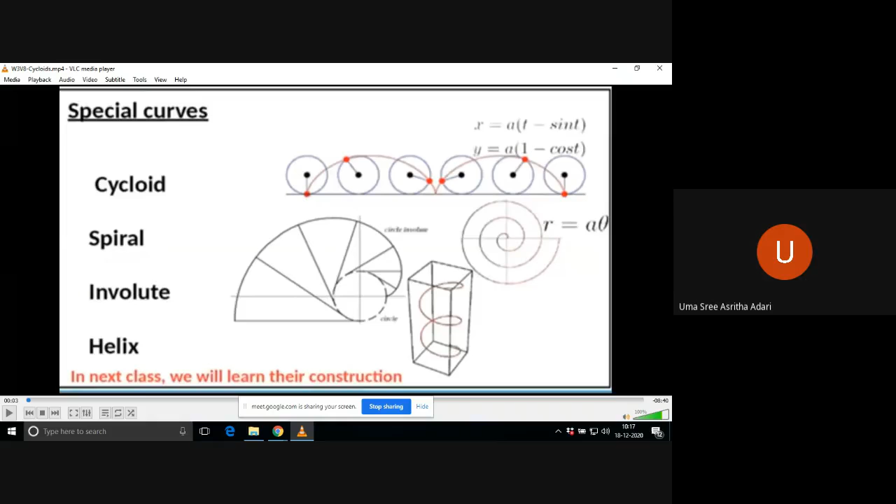Very good. These are some special curves like cycloid, spiral, involute, helix. Luckily, you don't have spiral, involute, or helix in your syllabus - only cycloid. In cycloid, we draw cycloid, epicycloid, and hypocycloid.

The mathematical formula is x equals a times t minus sin t, y equals a times 1 minus cos t. Anyway, you need not remember these formulas, because we are not interested in mathematical formulas. We are interested in drawing the curve.

Now, are you able to see the red curve like this? Yes, sir, it is a continuous process, taking a curve like this. How is this curve generated, and how do we generate the required points? If you don't get the required points, you may not be able to draw this curve with your free hand. To draw this particular curve, you require a number of points, so our task is to generate enough points so that we can easily draw the curve.

Even though spiral, involute, and helix are not in your syllabus, it's better to have some knowledge of spiral. It is something like when you have a spring, you can have this particular diagram.

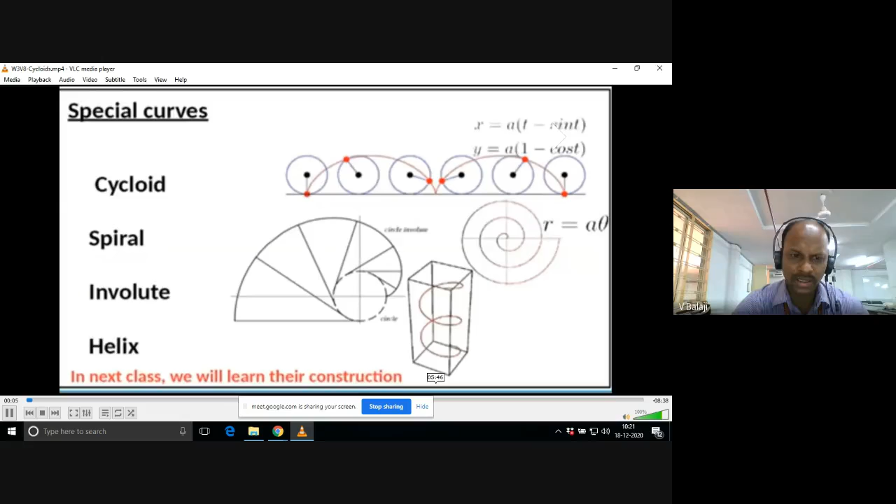Now here you see there is a gear - it is a mechanical gear. If you zoom into this gear, there you will find a special cutting at the teeth, in the form of a cycloidal curve.

Now I have zoomed it - the profile of the gear. You see here, these are the teeth of the gear. So many teeth are there for a particular gear. If you see the profile cutting of that gear, you will find this.

Now I am showing you here the orange type of thing, that is epicycloid, and like that you can find - I will show you all cycloid gears are similar. Three types of gears are there.

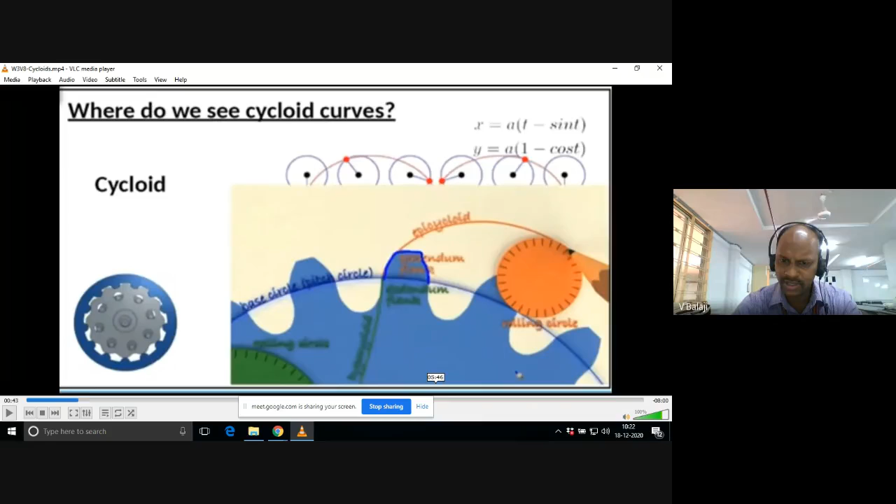And there is one more application for this cycloid - the isochronous pendulum. You might have heard about it in your engineering physics. The shape, the path it takes while it is oscillating, is in the form of a cycloidal curve. It's a special curve.

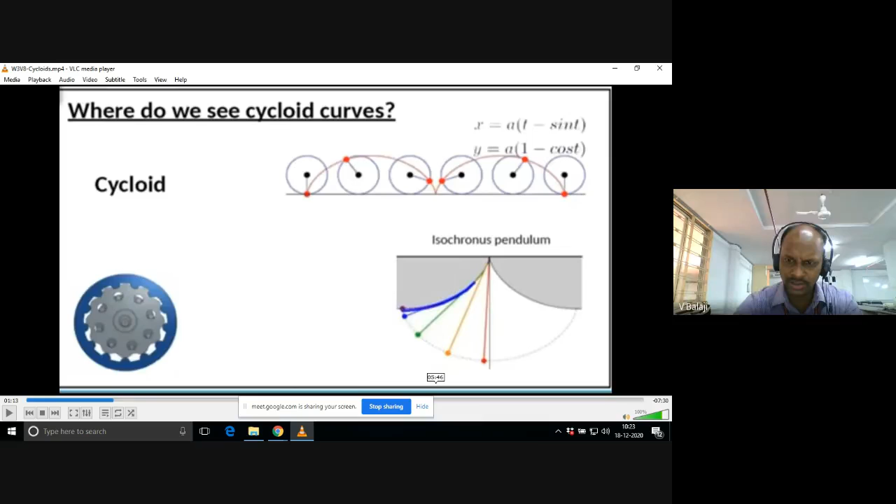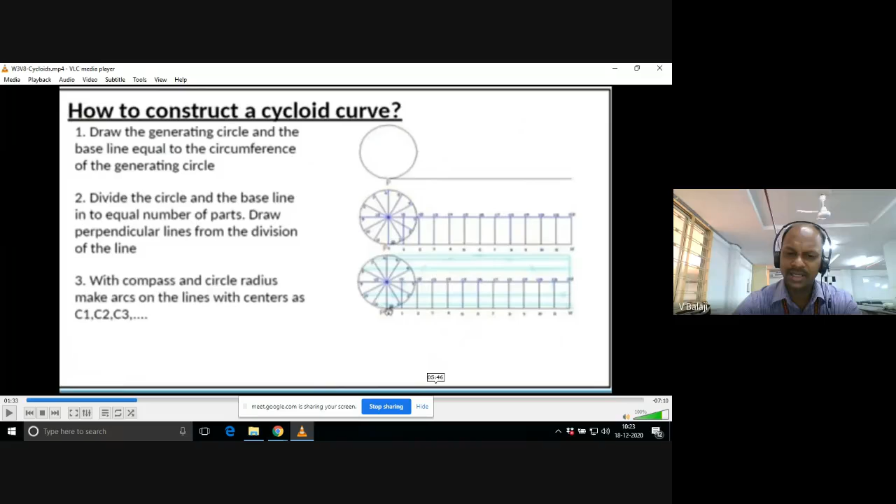And now our interest is to construct it - how to construct it on a drawing sheet. Let us see. I will tell you the step-by-step procedure.

Before that, what does the cycloidal curve mean? Suppose you take a cycle wheel - imagine this cycle wheel, and this is the ground, the horizontal ground. Suppose there is a contact point which is common to the cycle wheel and the horizontal ground - there is a common point P here. For example, if the cycle wheel is rotating horizontally without any slip, it is just rotating.

Suppose you take a pointer on the cycle wheel - this pointer also takes different positions while it is rotating, from this point to this point, for one complete revolution. So if you mark a point at the bottom of the circle initially, that point, while traveling from this place to that place for one complete revolution, will take different positions along the path. That path, which the point takes, we call the cycloidal curve.

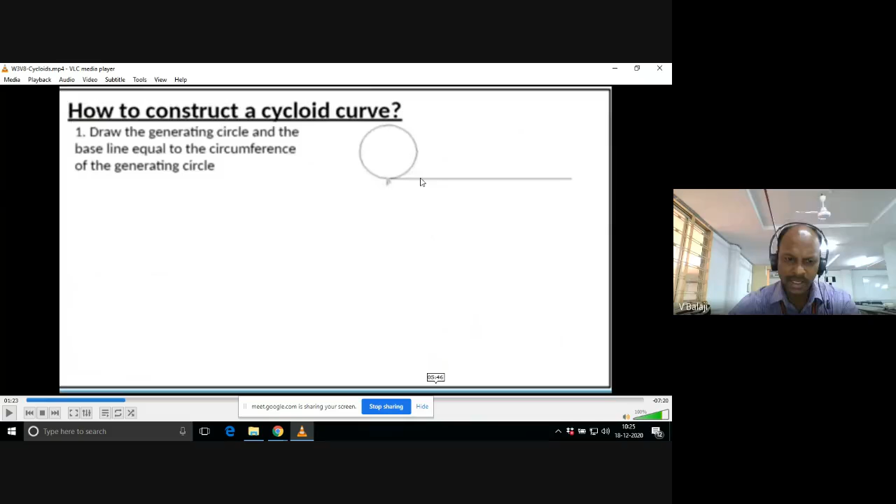Now, I would like to share one more screen to explain everything. I think I will show you one more figure to draw how to draw the cycloid. Okay, one minute.

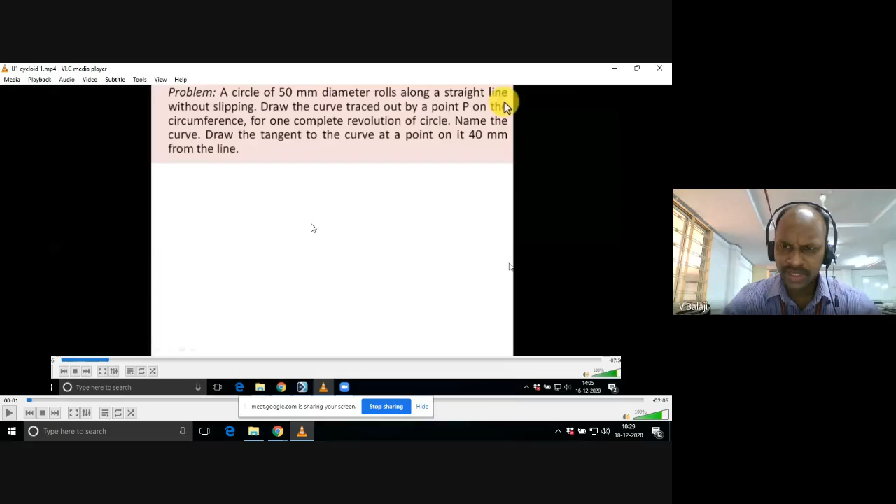So in the last class you were asking, right side of the ellipse we don't understand, sir, like that you were asking, right? So while I am teaching, if you draw along with me, even such questions may not arise. Okay, so anyway, if you are ready, please make it up, or else you practice at the end of the class.

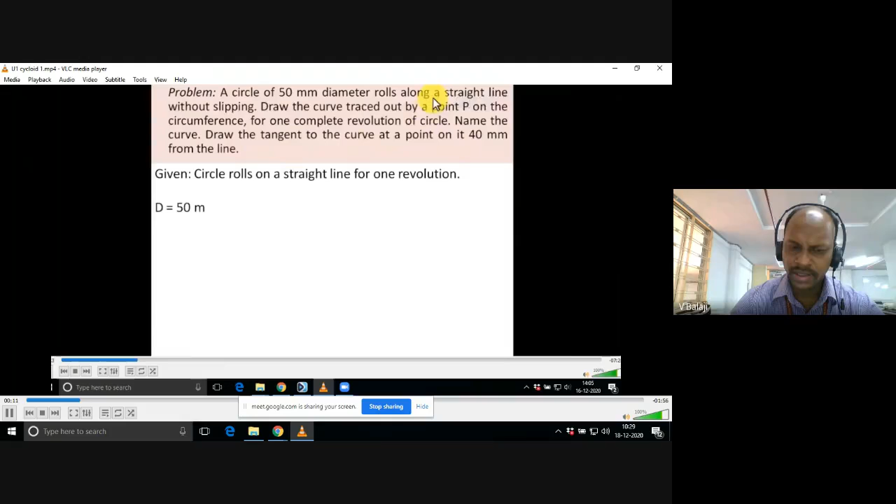The first important step is you read the problem carefully initially, that is very important. And note down some important theory aspects or data given in the problem. Okay, circle rolls on a straight line for one complete revolution, this is the important key data given in the problem. Neglect about tangent and normal, do that later.

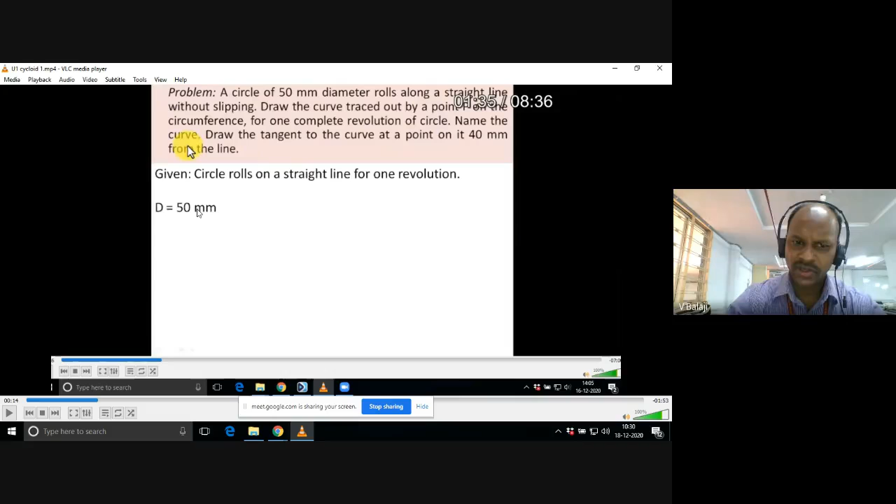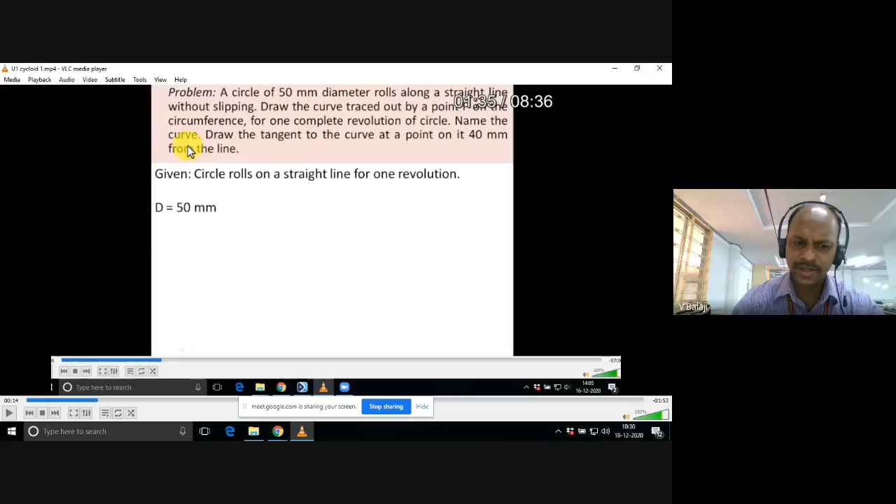So diameter capital D is 50 mm. So for one complete revolution, what is the length it is traveling on the horizontal ground? Do you have any idea? Circumference, yeah very good. Circumference means what is the formula? 2 pi r, yeah, you can write pi d or 2 pi r.

So you know pi means 22 by 7 into d. Calculate, 157.14 millimeters. Now you calculate this simple calculation.

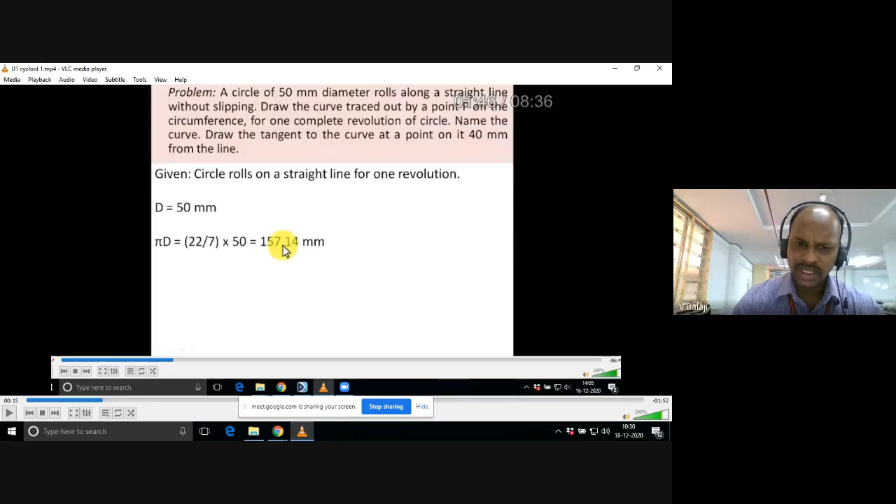Then you start our problem like this. Now what you have to do is you take a circle. What is the diameter of the circle? 50. What is the radius then with the compass? 25. Yeah, with the compass take 25 millimeter only, 2.5 centimeter or 25 millimeter.

Draw one circle. Okay, and at the bottom of the circle mark point P, and from P you draw one horizontal line, PQ, which is of length pi d. Now you can understand why we have drawn this pi d length, because the point P initially here, after traveling one complete revolution.

After the circle or cycle wheel rolls for one complete revolution, initially the circle is here, right?

After some time it is rolling, so it goes to here, taking a maximum distance of pi d. Now divide the circle into equal parts.

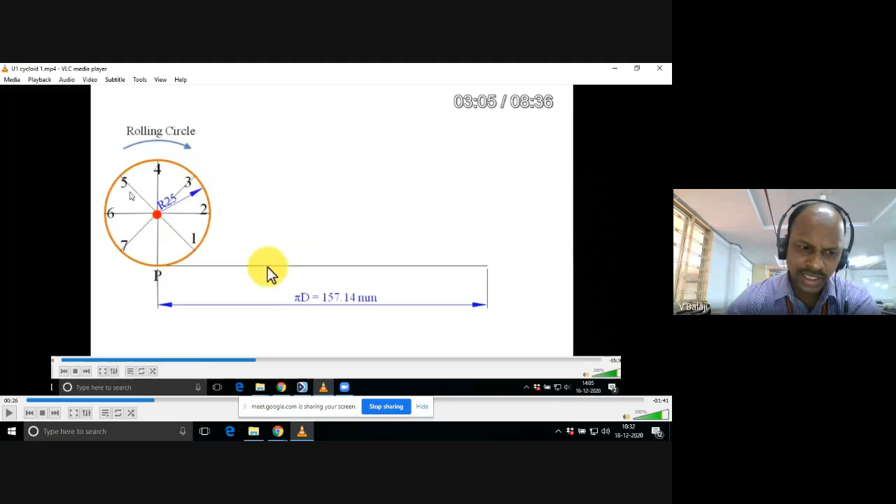Even number of equal parts. How many parts have I divided here? 8 parts, right? So how to divide that with your instruments? You have so many instruments, right? Which instrument do you use to divide the circle into 8 parts?

Any idea? Protractor, 360 degrees. Yes, protractor. 8 parts means what angle of the protractor do you need to take? 45 degrees each. Very good, very good.

You can take even 12 parts by taking 30 degrees, so that you will have more points and can easily join the curve. So don't take less than 8 parts, minimum 8 parts, and you can even take 12 parts.

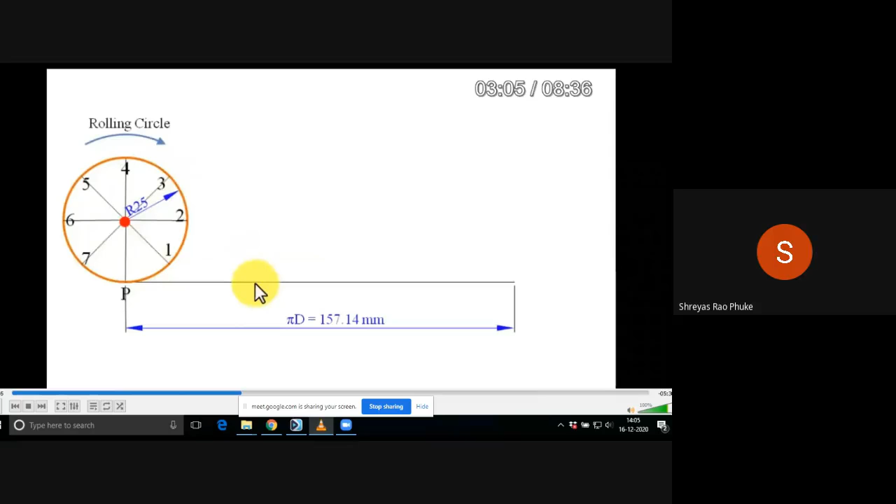Now you see the rolling direction. Is it rolling clockwise or anti-clockwise? Clockwise. Very good. So the starting point is P at the bottom, which is touching the ground.

This pi d length I am drawing horizontally. Treat this as the ground, a horizontal ground. Now the numbering system - you need to put numbers to the parts. You have divided 8 parts, right? So from P in the anti-clockwise direction, give the numbers 1, 2, 3, 4, 5, 6, 7, like this. That means this is the first part, second, third, fourth, 5, 6, 7, 8 parts are there.

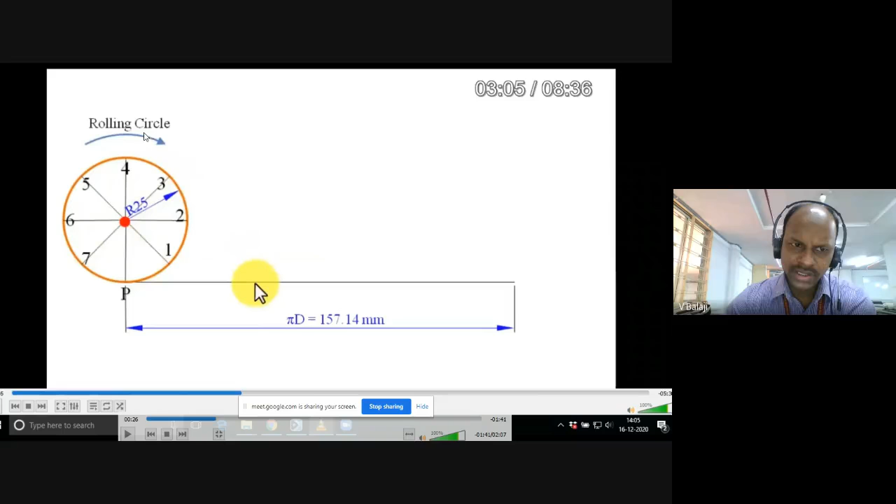You need not mention 8 because P is already there. Don't write 8 here, not required. Remember, the rolling direction is clockwise, but take the anti-clockwise number system: 1, 2, 3, 4, like this. Can you do up to this? Any difficulty here? No difficulty, sir.

The next step is to mark the center somewhere here. You call the center point as C. Then how many parts have we divided the circle into? 8 parts, right?

Similarly, divide the pi d length into 8 equal parts. How do you divide the length pi d into 8 equal parts? Line division method, yes, very good. You know, we need to draw 8 arcs on the angular line we have taken.

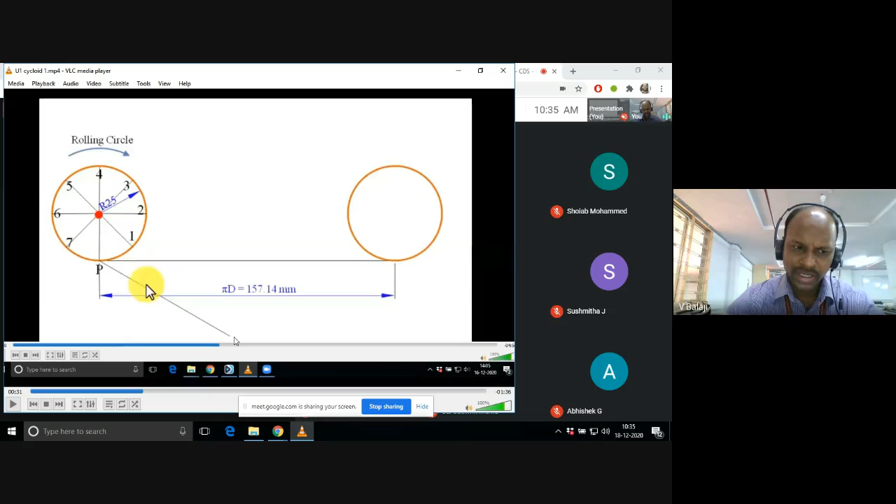Can you make it like this? 8 arcs: 1, 2, 3, 4, 5, 6, 7, 8. What is the angle of this line? Any angle, less than 90 degrees, 0 to 90, any angle according to the space available on the drawing sheet. If you take more angle, it will take more space on the drawing sheet, so you better take a smaller angle and mark 8 arcs.

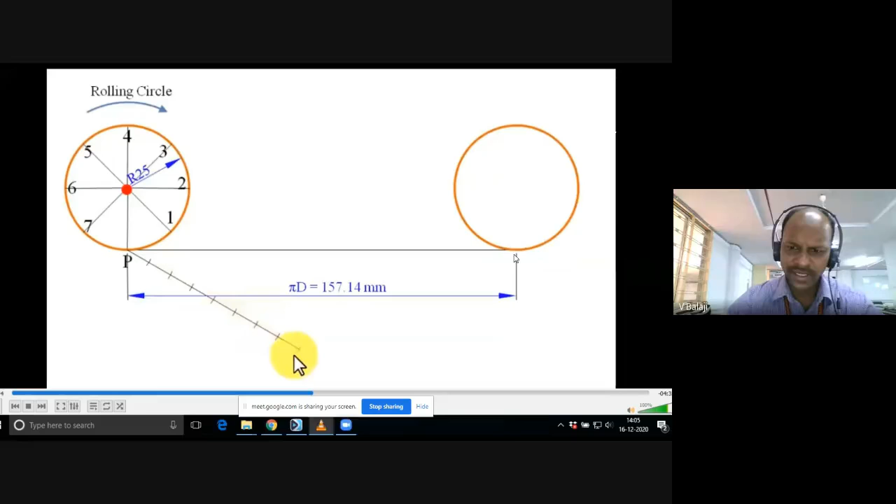The last arc we need to join to the other end of the line which we are going to divide. So this point is joined to the other end of the line like this. This is a very important line. And here I am showing you one more circle that you need not draw - not required. If you are interested, you can draw it, nothing wrong, but it is not required.

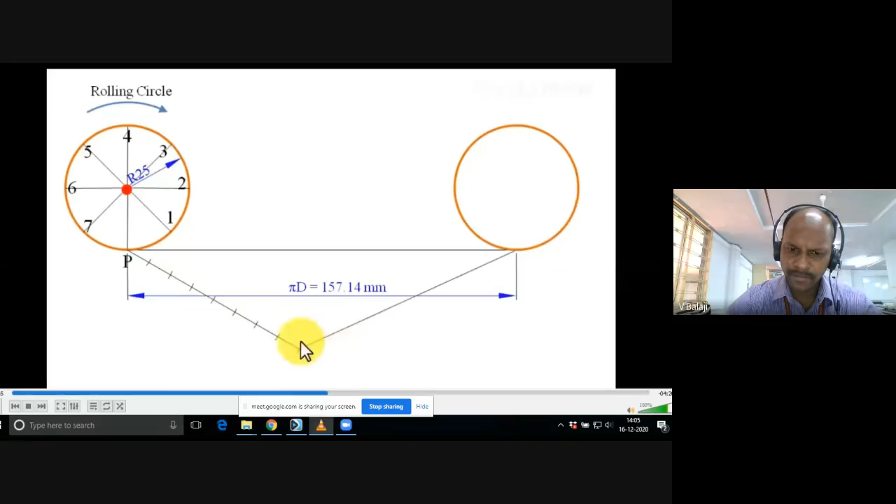So after that, to divide into 8 parts, I have to adjust my mini drafter parallel to this line and move the drafter parallel to this line from different arcs. Like this. Can you do this, right? So automatically this horizontal ground is divided into 1, 2, 3, 4, 5, 6, 7, 8.

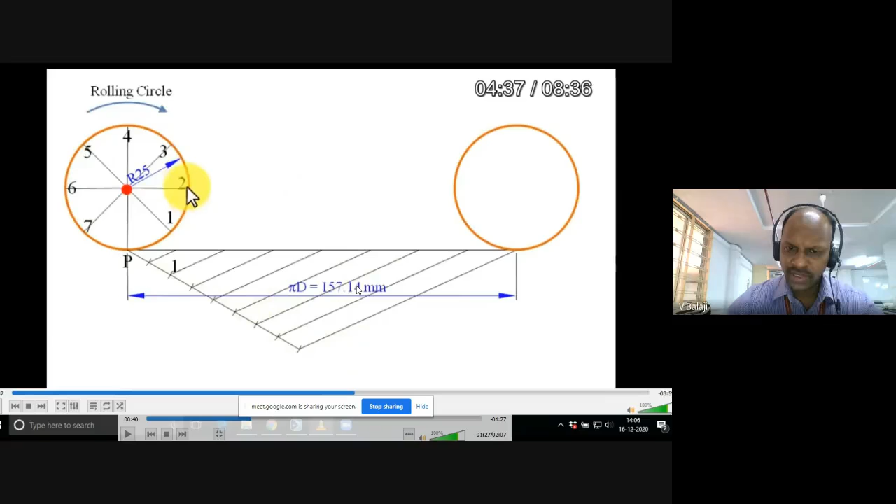So this is 157.14, but roughly with the mini drafter you can take it as 157. Forget about the 0.14, it's very negligible, right? So you automatically divide it into 8 parts without any calculator - not required. Directly you can use this line division method, and automatically this length pi d will be divided into 8 parts.

The next important step is the numbering system. Take P, or you can take PQ, whatever you wish. Then put the numbers 1, 2, 3, 4, 5, 6, 7. And the dimension line you can put like this, away from the drawing: pi d equal to 157.14.

Then, the next important step: passing through 1 and 7, draw one horizontal line. Passing through 2 and 6, draw one more horizontal line. Passing through 3 and 5, draw one more horizontal line. Passing through 4, draw one more horizontal line. How many lines are there now, apart from the ground line? 1, 2, 3, 4.

4 lines you have to draw. The first line is common for line 1 and 7. The second line is common for number 2 and 6. The third line is common for 3 and 5. Line 4 is common for 4. So these are the 4 horizontal lines we need to draw.

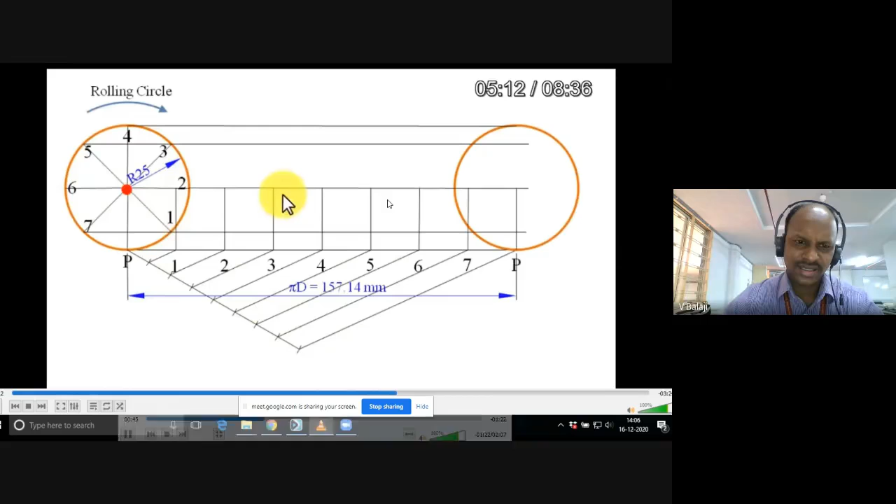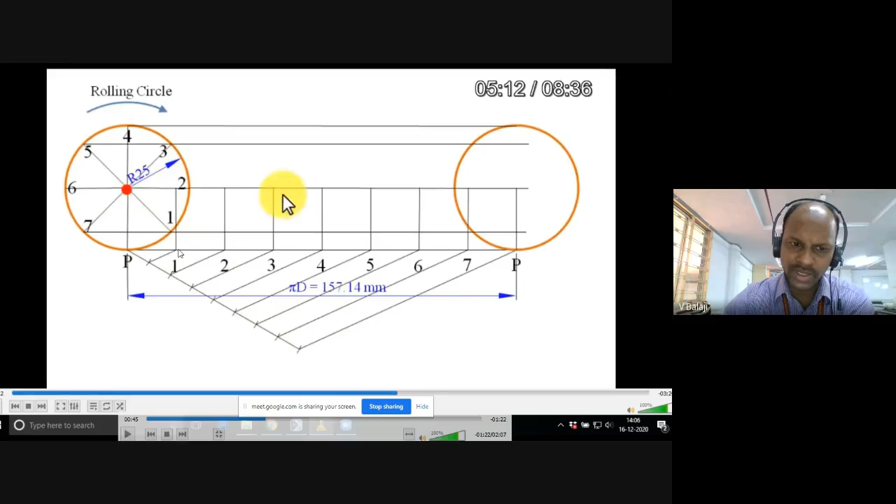Next step: from the ground we got points 1 2 3 4 5 6 7. Draw vertical lines up to the center line. The red point is there, that is the center of the circle. There already you have a line passing through 2 and 6, that is the center line. Up to that you extend, or draw perpendiculars from the ground, like this, like this.

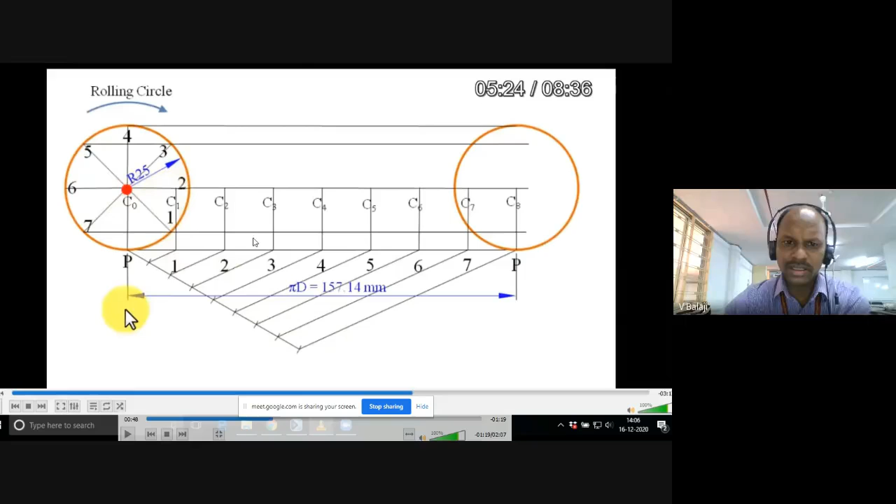Thereafter you number, starting from C naught. The center of the circle is C naught, and the first perpendicular from the ground is 1 to C1, second perpendicular 2 to C2, third perpendicular 3 to C3. Like that you continue up to C8. Actually C8 is not required, up to C7 you can do it. Then, almost like ellipse, parabola, hyperbola, we have done the steps required to construct a cycloid.

The last important step: take your compass, set the radius 25. The radius is constant, don't change the compass radius till you complete all the arcs. Take your compass, radius 25. The center of the compass will be changing from C1, C2, C3, C4, like that, but the radius of the compass is 25 only till you are cutting all the arcs.

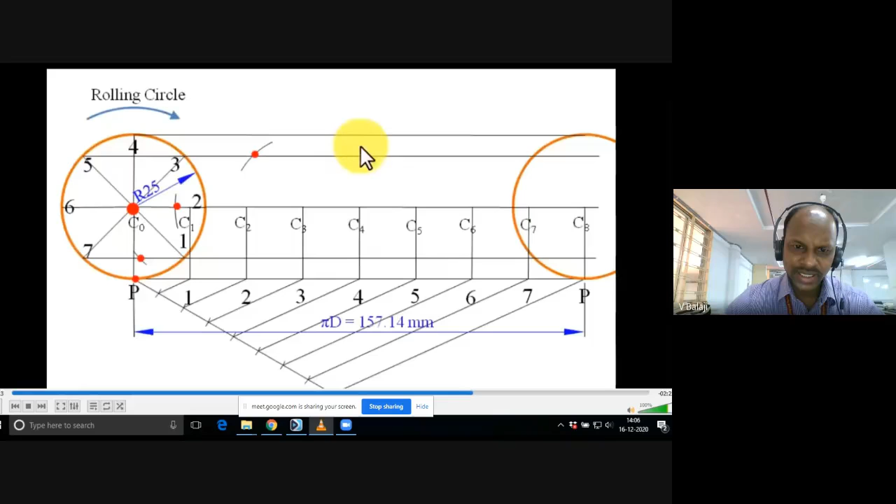Yes sir, yeah. Now go to center C3, cut the third line common to 3 and 5. Next, go to C4 center and cut the fourth line. The fourth line is common for only the fourth point. And you will get one more arc.

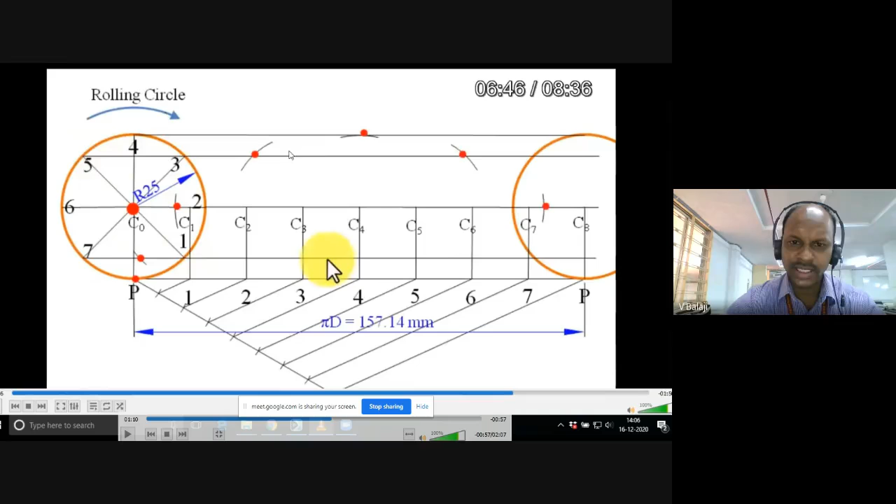Now you may have a doubt here: if you go to C5, center C5, where do I cut, left hand side or right hand side? Because as we move, the curve will look like this, a symmetric curve. So after finishing the center point we generated, the next points you have to cut on the right hand side. C5 is the center, and the fifth line is the same line common to 3 and 5, because center C5, fifth line means again the line common for 3 and 5. So cut the fifth line, right hand side you have to cut like this, don't cut left hand side, because we are getting a symmetric curve. That you must know.

Now go to the C6 point, again center C6, which line do I have to cut? Can you please tell me whether you are following or not?

From center C6, draw a line. The line common for which points? 2 and 6. Very good, 2 and 6. You will get one more point.

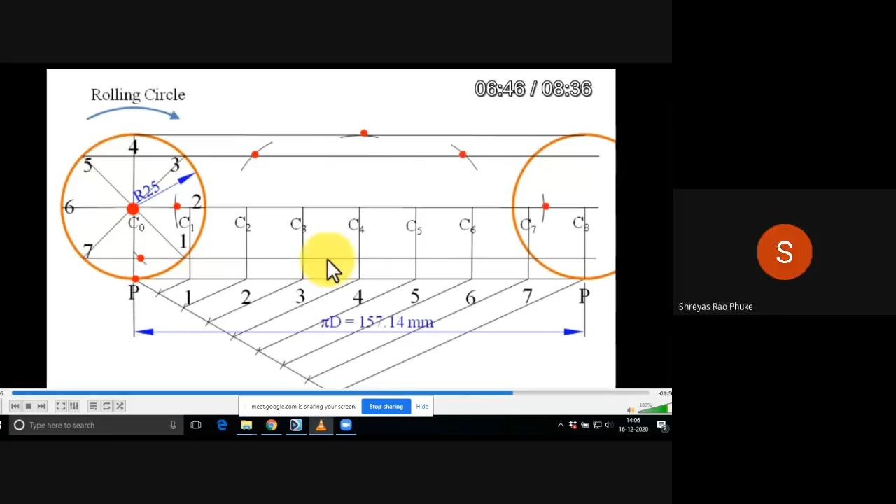Lastly, C7. With C7 as the center, cut the line passing through 1 and 7. So I got the required points. You need not consider C8. I told you, don't write any 8 here. You need not write 8. C7 is sufficient.

Then, lastly, the initial point is P, and the end point is also P. You can note down, so I got how many points? Starting with P, 1 point, 2, 3, 4, 5, 6, 7, 8, 9. So if you neglect the base ground points, you will have 1, 2, 3, 4, 5, 6, 7. Actually speaking, you have generated only 7 points.

P and P, the starting and ending points, are the horizontal ground points, where the point started and where the point ends. Per one complete revolution, this is the length traveled by that point horizontally, by the length it takes on the horizontal path. So this is the procedure to generate all the required points.

Thereafter, it's a simple procedure. You can take your HB pencil. All other lines till now, including the circle, including the perpendiculars, all horizontal lines, even the line division method, all of that you have to use 2H pencil, a light pencil. Okay, then coming to the...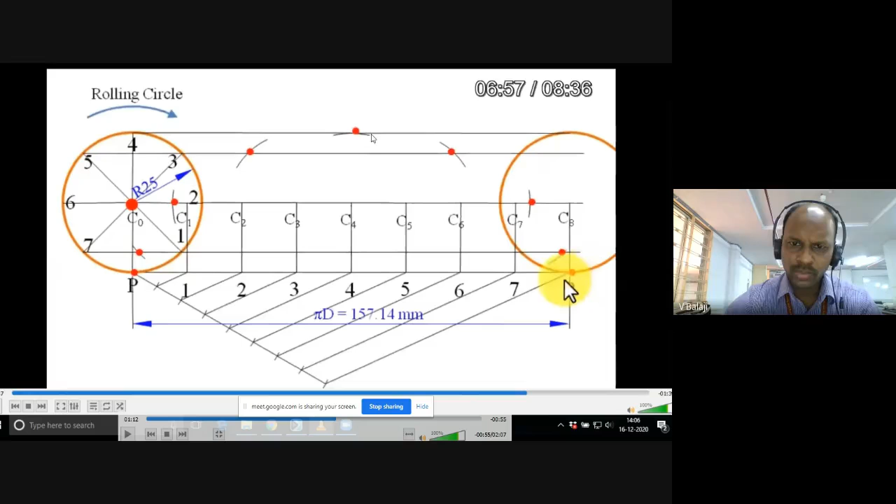HB pencil, take your HB pencil, use freehand, draw a smooth curve passing through these points. You will get a smooth curve. I call it as cycloidal curve.

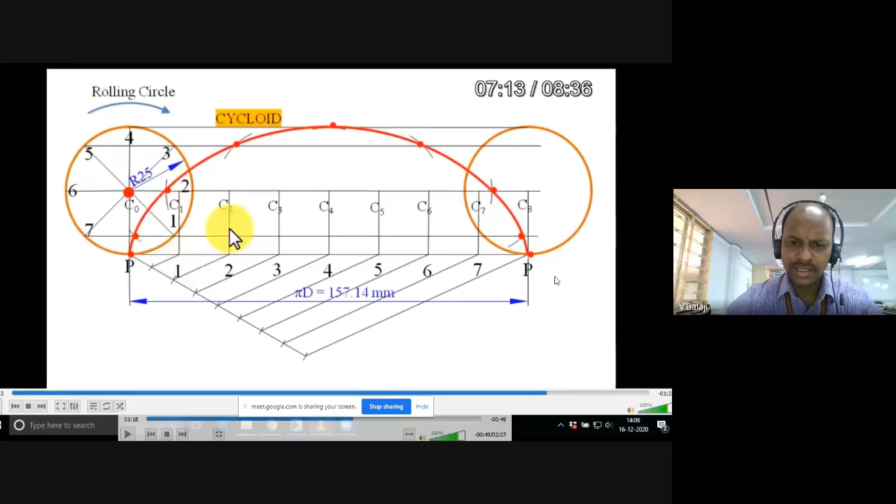Is it clear? Yes, sir. Yes, sir. Yes, sir.

Now, one more important thing is how to draw the normal and tangent if you are given a point on the curve somewhere.

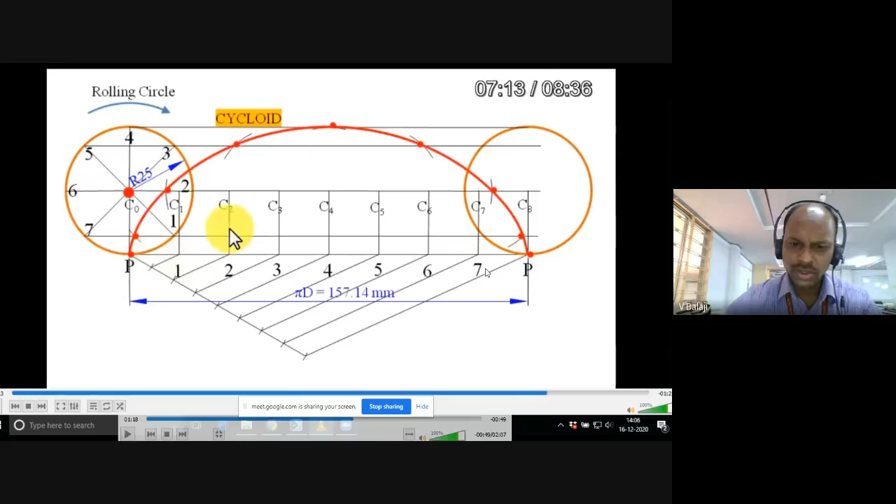Select any point. If it is given in the problem itself, you follow that distance exactly. So in the problem, some height is given, right? Some 40 mm from the ground—you take a 40 mm horizontal line. It is meeting the curve somewhere here. You call that point as some Q.

Just listen, thereafter I will continue. From that point Q, take again your compass, radius 25, and cut the center line passing through 2 and 6, somewhere here. After that, you draw a vertical line onto the ground.

It is very important because these steps you can apply for even epicycloid and hypocycloid—there are two more special curves in this particular topic. We need to draw these using the same procedure. So remember the steps; while drawing normal and tangent also, you can adopt the same procedure, starting from the given point on the curve.

Sir, can you please show the method to draw normal and tangent again? Yeah, sorry, one minute. See... one minute.

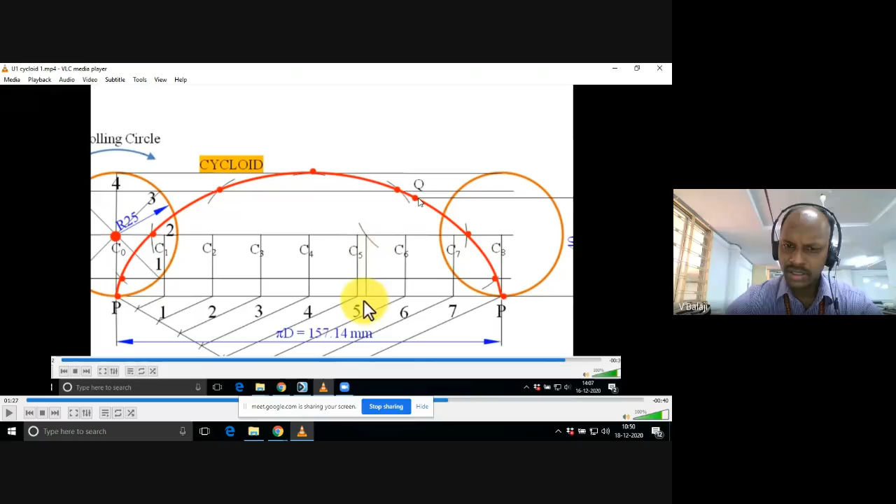Okay, and from that point, take a 25 mm radius. Draw one arc on the center line—the center line passing through 2 and 6. This arc you are getting with the compass. From that point, you draw a vertical line onto the ground. So this is the point.

Now take that point as some M. Join M and Q. That is the required line. Now tell me, is it normal or tangent? Normal, sir, because it is passing inside the curve. So normal. How to draw the tangent?

Now do you tell me? Draw a line perpendicular to the normal and it will be tangent. Correct. Simply, normal and tangent are mutually perpendicular to each other. Already I got the MQ line, the normal line.

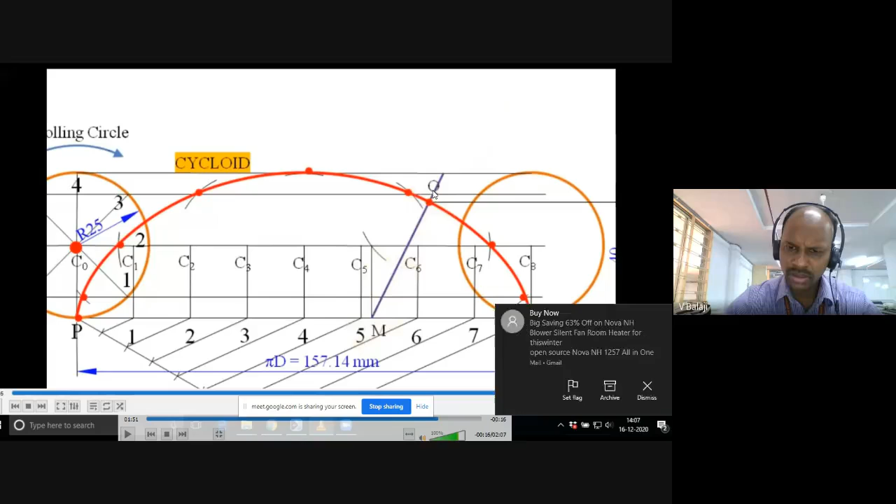Using a protractor or mini drafter—the mini drafter has a 90-degree scale, right?—simply match one of the mini drafter's scales to this MQ, and draw one more perpendicular line to that. That is going to be your tangent.

So like this, you need to draw a tangent. You see, this is the tangent. It is drawn outside the curve, touching the curve tangentially, I can say. So this is the way you need to make up the cycloidal curve.

So here I have shown you 40 height. You draw one horizontal line. That is the required point at which we need to draw the normal and tangent. So for that reason I have drawn one 40 height line here. With your drafter, just mark a point at 40 and draw a horizontal line with the help of mini drafter, parallel to the ground PP.

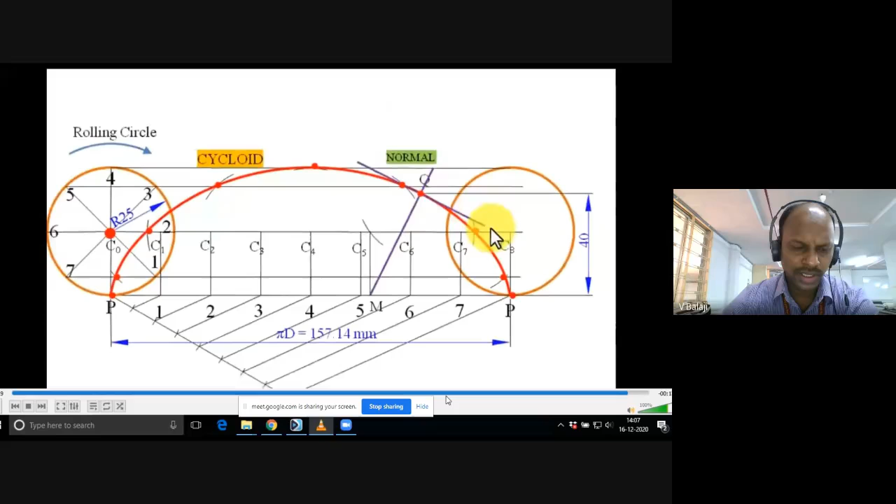You would understand later, don't worry. Any confusion in the procedure, you can raise it, 2 or 3 questions, then we will move further and discuss more. Any other specific questions? Or else can I repeat the entire procedure? Yes, sir, repeat, sir.

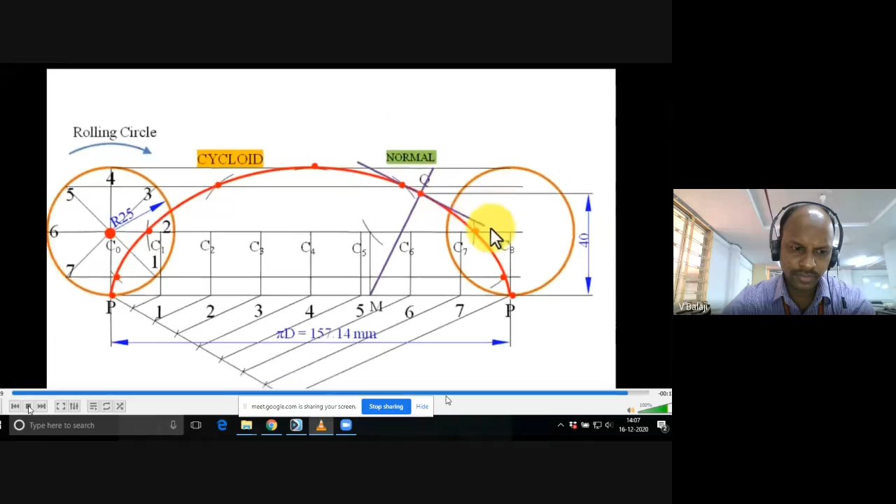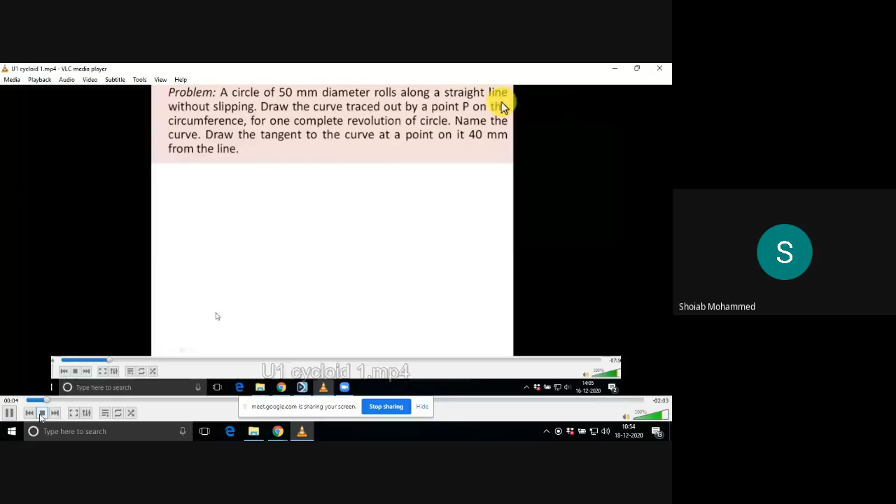Is my screen visible to you? Again, any problem? Visible, yes sir, it's visible.

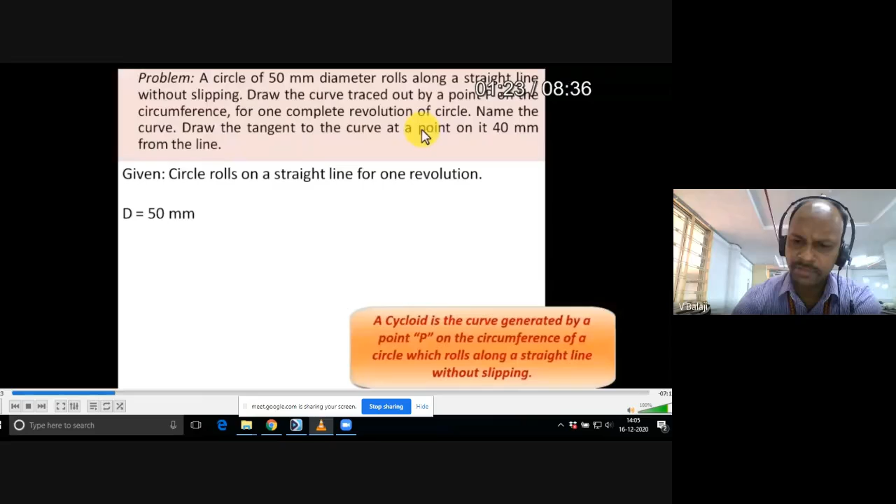Okay, now this is the problem you are given. The data is very simple data. Simply they will give you only the diameter. Draw the cycloidal curve for one revolution, that means pi d length only. So take a rolling circle, 25 radius, since diameter is 50, right?

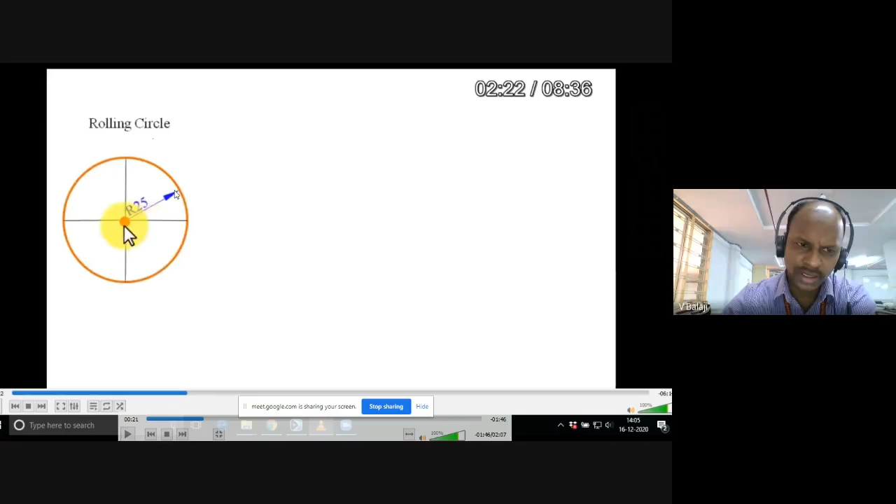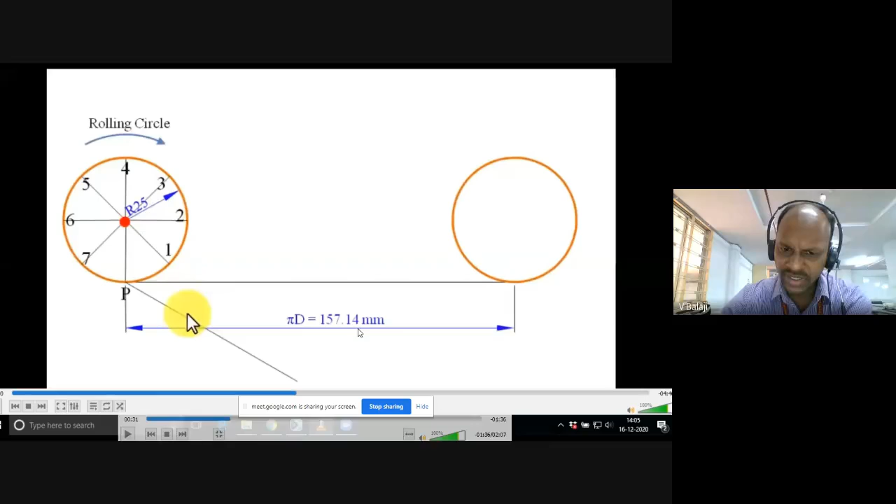Draw the circle, first divide it into 4 equal parts, then you can use the bisector method or a protractor to divide it into 8 equal parts. Then give the numbering system opposite to the direction of rolling. Take 1, 2, 3, 4 like this in the opposite direction to the rolling direction. That is important. Make it 1 to 7, starting point P, end point also P. Pi D length is 157, if it is 157.8 take 158, but it is 157.1 only, so take only 157. Divide this pi d also into 8 equal parts like this, using the line division method explained earlier, right?

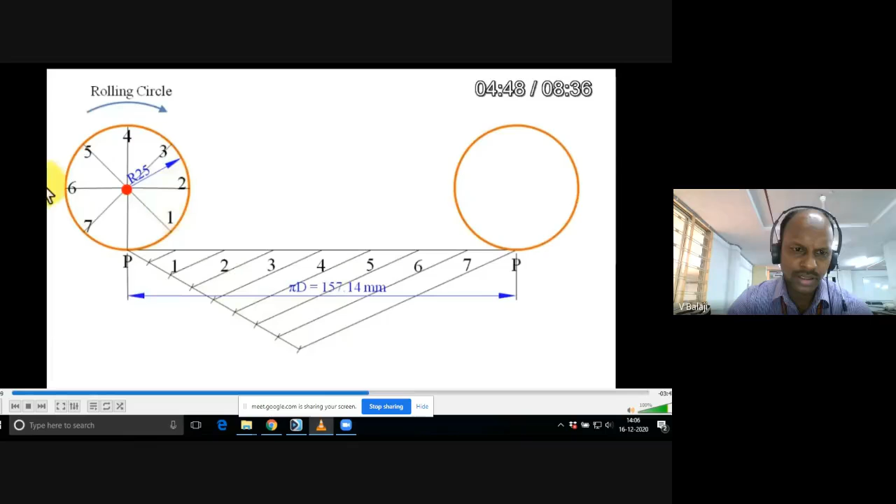And you can draw one more circle at the end, not required, but if you want to draw, you can. And draw 4 horizontal lines passing through 1 and 7, because 2 and 6 will lie on the same line, and 3 and 5 similarly. So you draw 4 horizontal lines.

Use the mini drafter while drawing these horizontal lines. Whenever you draw with your mini drafter, first set the mini drafter parallel, matching to this PP ground line. While moving your drafter from here to here, set the mini drafter matching to PP, tighten it. Then gently move your drafter from bottom to top, passing through 1, 7, 2, 6, 3, 5, and 4. While moving the drafter, only hold the mini drafter knob, don't keep your hands on the scale.

After tightening the drafter knob matching to this PP, then hold the mini drafter knob and move the drafter from bottom to top to draw the horizontal lines passing through 1, 2, 3, 4. That is important, usage of instruments is very important.

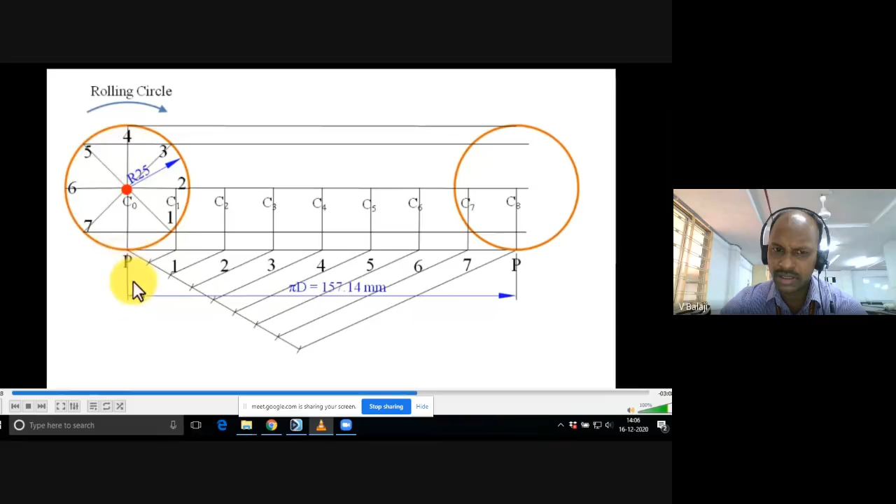Draw vertical lines up to the center line. Name them as C0 center, first center C1, C2, C3, C4, C5 on the center line, only up to the center line. Extend all the verticals.

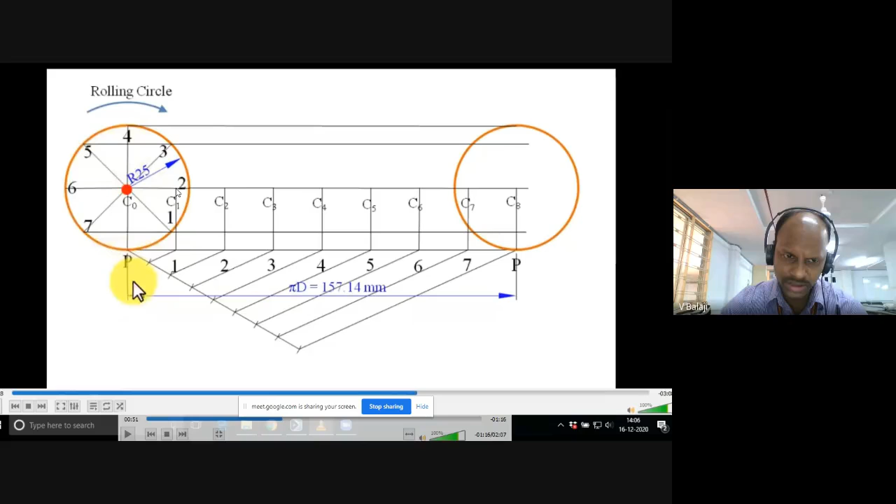Thereafter, our procedure is almost completed, right? Take your compass, set the first radius, the radius is fixed. First center C1, cut the first line common to 1 and 7 somewhere here. And this is the first arc we are getting from center C1. Radius is always constant, it's 25 only.

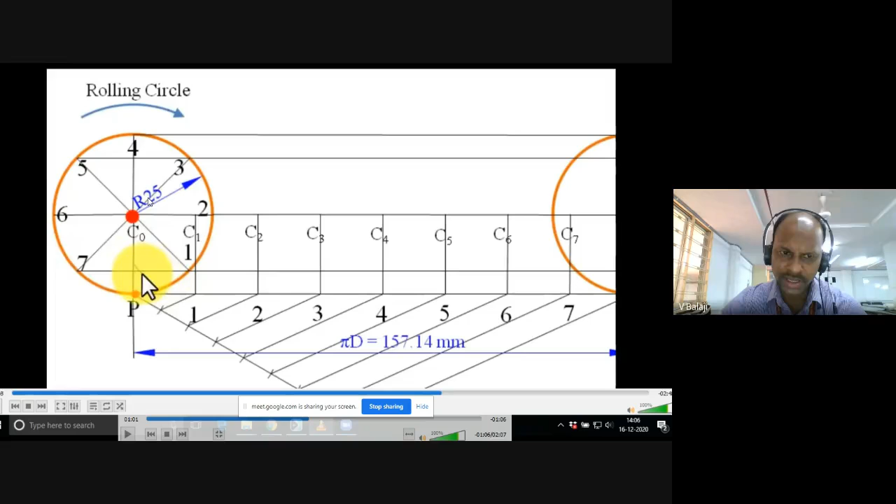Don't change the radius because through the rolling, the circle diameter is not changing. So don't change the radius of the compass, but change the centers C1 to C2, like that. In that way, you will have so many points like this. Simply join all those points with a smooth curve, freehand only. Don't use any French curves. Practice it, first time may not come exactly, but see that it is symmetric.

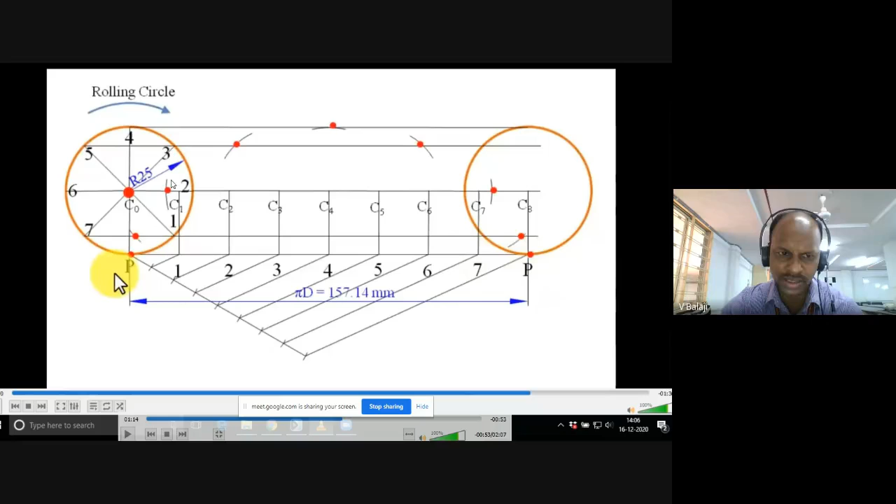Up to this, however you are drawing, similarly try to draw in the same fashion on the right hand side also. Then you will find a smooth curve like this.

And for finding the normal and tangent, what you have to do? Take any point at a given distance, 40 mm height, draw one horizontal line. Call that point Q. If nothing is given about the height, you can choose randomly anywhere on the curve. Apply the same procedure to get the normal and tangent at that point. For a curve, at any point, you can get one normal and tangent.

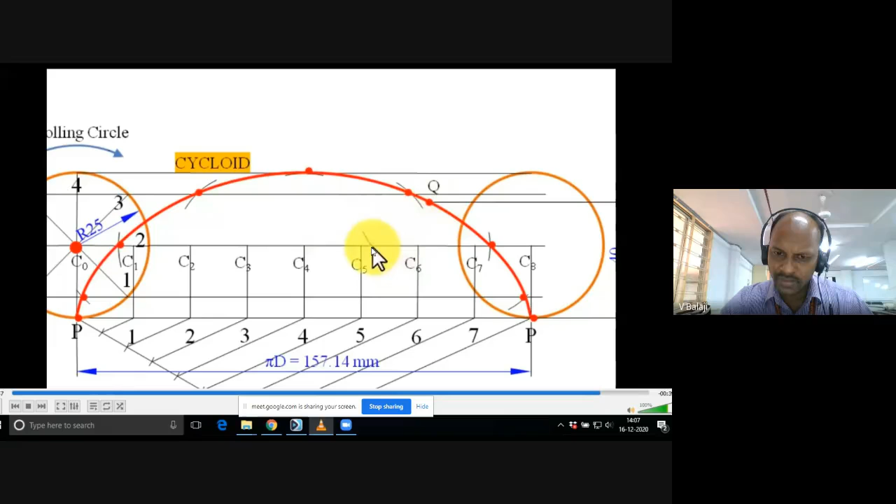So after selecting point Q, take 25 mm radius with the compass and cut the center line. Somewhere here with radius 25, I got this arc. After cutting the center line, you got one point here. Drop down one more line onto the ground, like this. Now you will get one more point here on the ground. Join that point to Q.

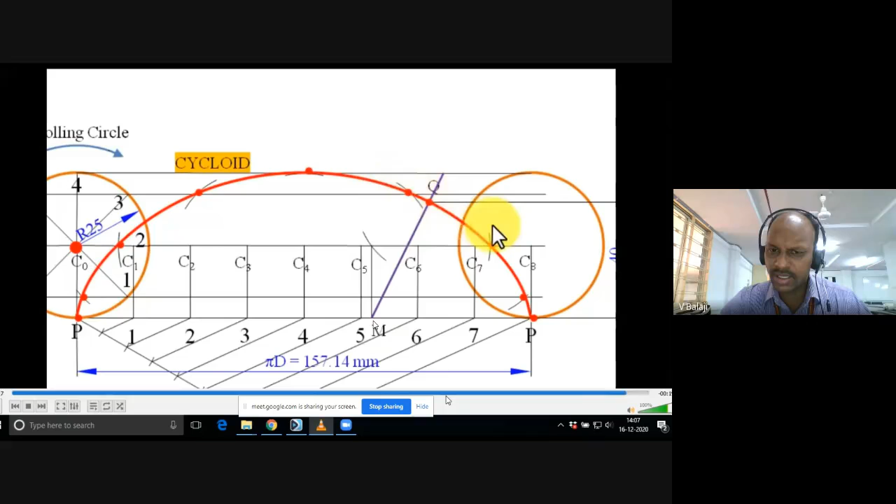Starting where you selected the point on the curve, call this point M, and this point is already Q. This is the normal. With the help of a protractor or mini drafter scale, you can draw the tangent at point Q. At point Q, you need to draw one 90 degree line to this normal — that is the required tangent.

So I hope you will be able to make up this sketch, this drawing, in the next class. Can you show me?

Yes sir, yesterday you have given 3 diagrams, sir, that one we should submit to your mail, sir. Okay, I'm asking, can you be able to make up this cycloid? Yes sir, but how to show you?

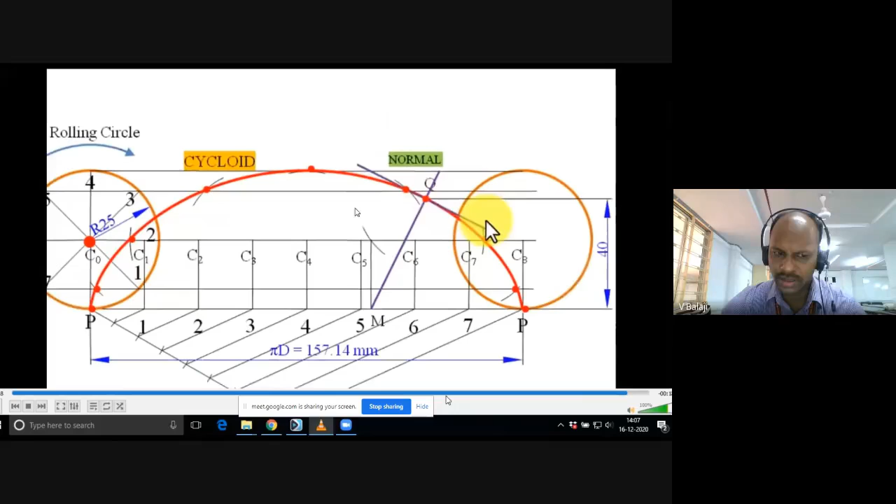What is next is epicycloid. What's the time now? So we are having 7 more minutes. Just I will give you some outline of epicycloid, then we will discuss or draw it in the next class.

Please sir, wait, one doubt sir, in this cycloid... no sir, about the drawing sheet, can we write with pen, sir? Everything, I mean titles? No, title names, no, never use pen.

Always use HB pencil while writing the title and all. Inside the drawing area, wherever you require to use HB pencil, use HB pencil there only, otherwise use 2H pencil only. Never use pen. I will give you an option — while writing your name or roll number, you can use pen. Otherwise, don't use pen anywhere.

Then coming to the... I will give you a small introduction of epicycloid.

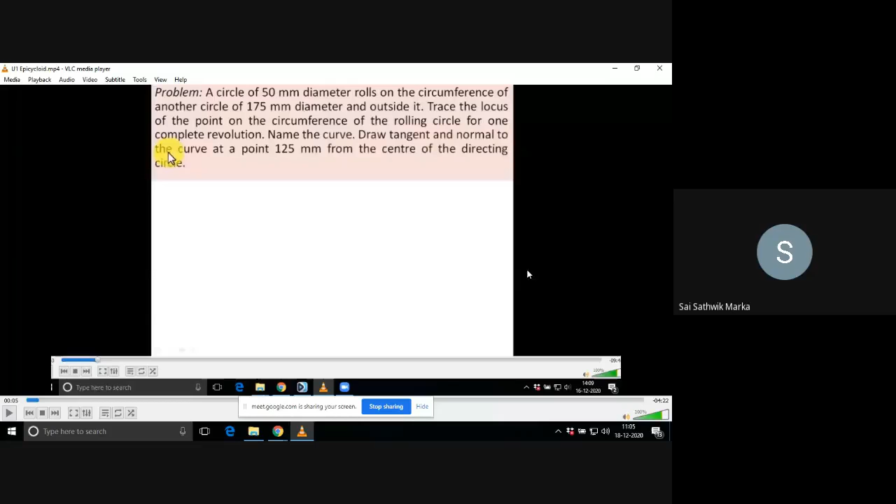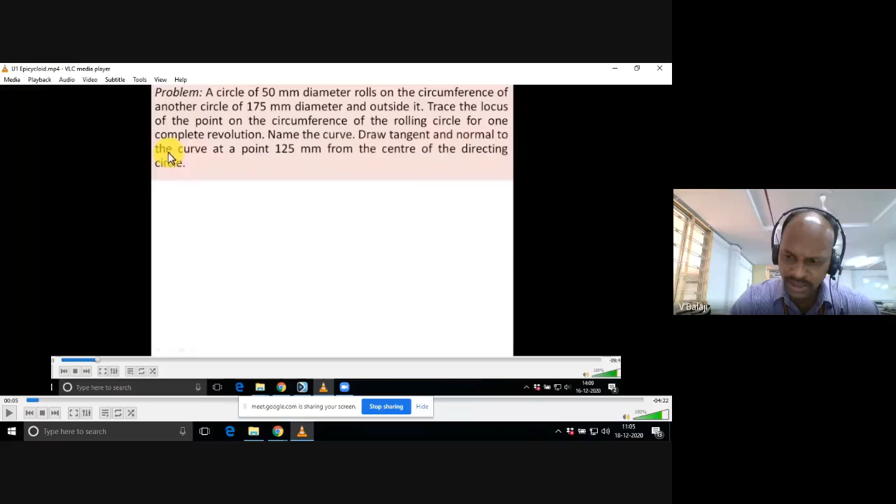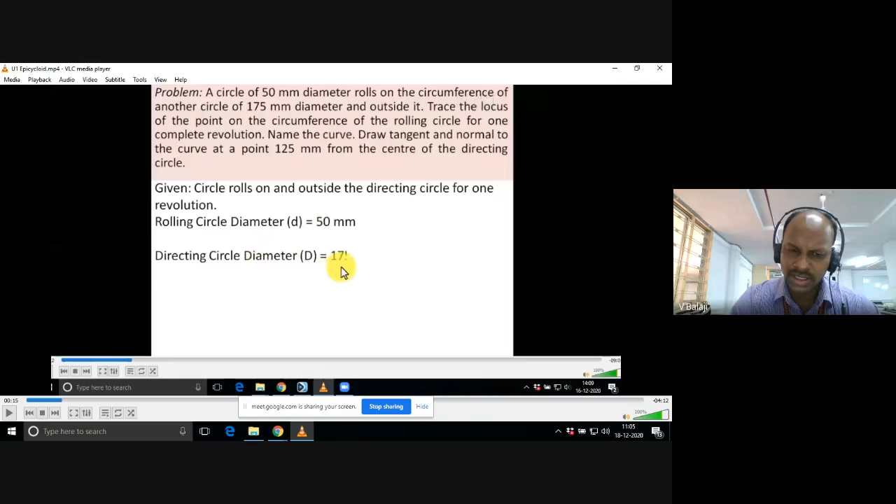See, this is again almost similar to the cycloidal curve, but more data is given. Diameter 50, rolling on the circumference of another circle of 175 mm diameter, outside it. I just want to show you this briefly, not discuss in detail. As given for the rolling circle like the earlier cycloidal curve, here one more directing circle is also there, on which the rolling circle is rolling outside that particular directing circle.

Let me show you here. This PP is the ground. Earlier the ground was horizontal, right? Now the ground is not horizontal. We are calling it the directing circle, on which our cycle wheel is actually rolling now. That means there is a curved path. There is no horizontal ground here, there is a circular path.

Outside that path it is rolling now, that is the difference. The procedure otherwise is same. Earlier we drew horizontal lines from 1, 7, 2, 6, 3, 5, 4, right? Now we will draw circular arcs passing through 1, 7, 2, 6, 3, 5, 4. Because it has a directing circular path, we are supposed to calculate some included angle, using a simple formula.

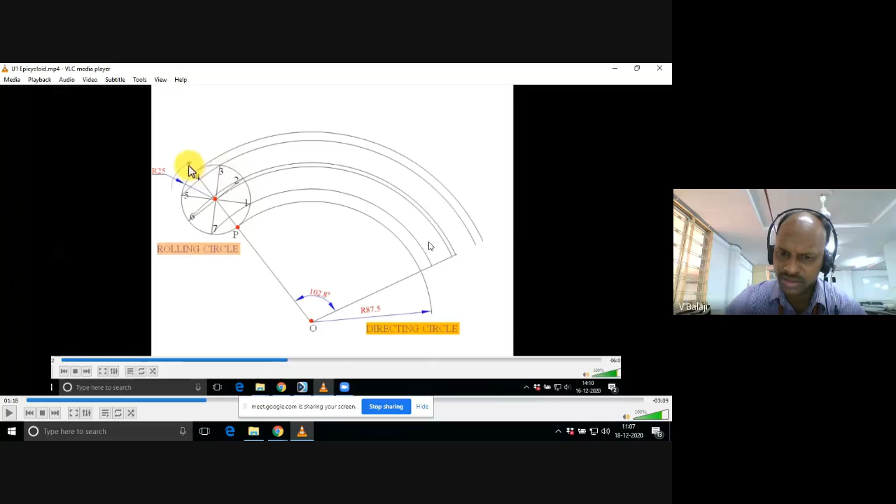Apart from that, there is no procedural difference. You can apply the same procedure, the same steps followed for the cycloidal curve, and you will automatically get the epicycloidal curve. So briefly, I am showing you how it looks. Again, we are generating centers, okay, everything is same, and we get so many points to be joined together to form the epicycloid.

Now I got so many points. Thereafter, using freehand, I will join starting from P to ending with P. So now I will ask you, what is the difference between this curve and the earlier curve? Is there any difference? It is looking like that only, right? Previously we drew the cycloid. Do you find any difference?

Any questions or any response? I'm asking a question, right? Do you find any difference in the curve? Sir, previously PP dash was horizontal. Okay, that is a procedural difference. I am asking about the curve itself. Look at the red curve.